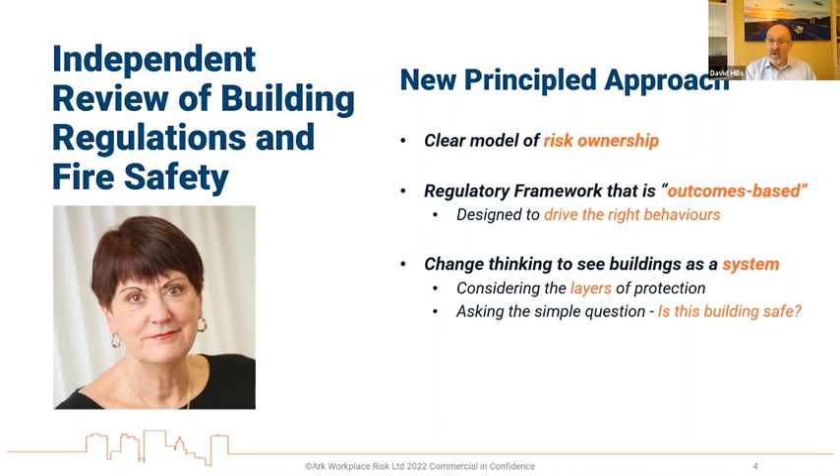In addition, we're looking to change the way we think of buildings and look at them as a system. We discussed this last time with fire risk assessments and risk assessments, looking at layers of protection, and really asking the simple question: is the building safe? And considering buildings on a case-by-case basis rather than being generic about the whole approach.

Finally, the idea is to bring in a risk-based approach to regulatory oversight, thinking about the numbers of people affected and looking at proportionality. So that's where we started from, and that's where the bill was looking to go.

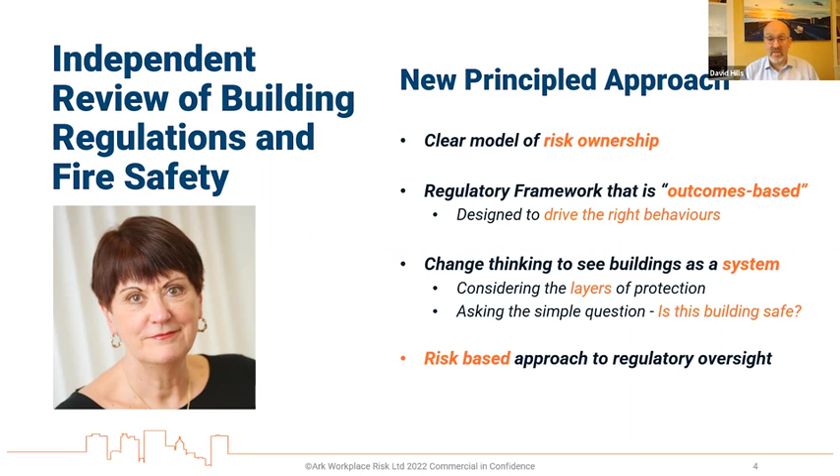Now, the government have put the bill in front of Parliament, and Parliament are reviewing it and making changes. But in the meantime, it's very clear that the government have been telling industry: you've got to get on and do these things. There are substantial changes coming, and we cannot wait for the legislative program to catch up.

Clearly there are some problems with that, especially for organizations who have spent significant money and time working on the building safety manager role. We'll see if that's going to be an issue. Personally, I don't think it will.

The responsibilities are still there. The accountability is still there. And there's going to be a need for competence and support to the accountable persons. So whilst the actual name 'building safety manager' may go, I personally believe the outcome is going to be that you still need some support and some advice.

And what the industry has been told is that there's no excuse, you've got to get on.

So what does the Act do? Well, as I've said before, really it provides you with a number of layers.

We've got the regulatory layer, which includes the new regulator, new rules and regulations in respect of CDM, or at least how the Building Act and construction design and management is operated.

We've got the accountability layer, which is focused on the new roles and making sure that the accountable person and principal accountable person are held to account effectively.

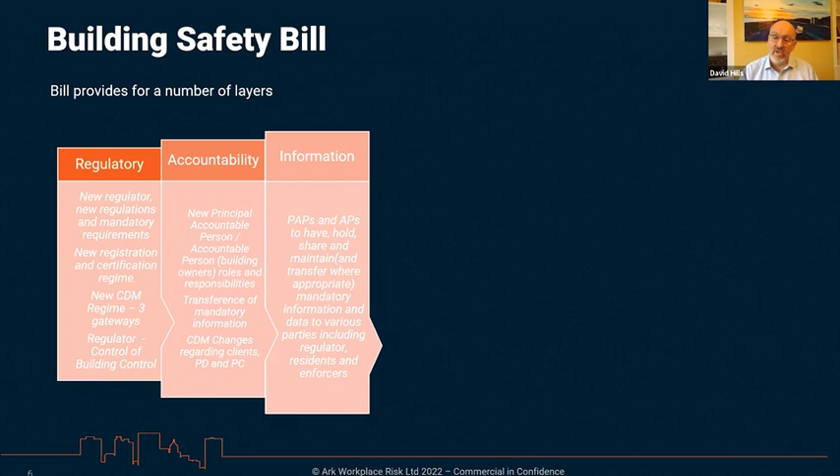We've got the information layer, which talks about the types of information and new requirements. In respect of that, we've also got the technology layer, which is this digital-first approach, making sure that the transfer, sharing, and holding of information is maintained in the right way.

Whilst not within the bill, there is a certain level of defensibility required. Organizations need to actually defend themselves, and therefore there are methods that they are going to need to use in order to achieve that.

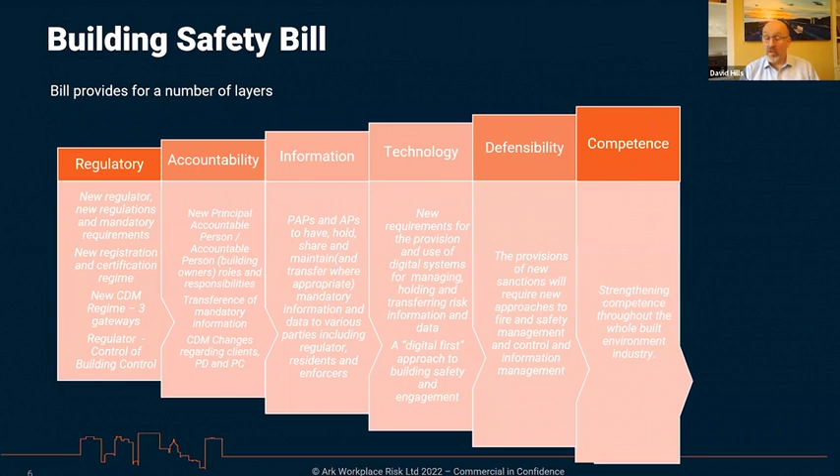We've got the competence layer. There is certainly a need, which I don't think we've really focused on sufficiently at the moment, but competence is going to be key in order to deliver the new regime.

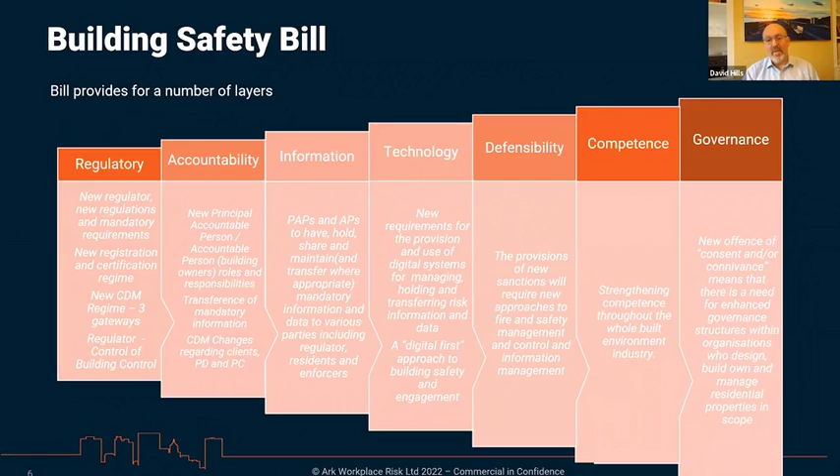And then finally, it's the governance layer. So how the bill operates is very much on the basis that it's actually an enabler. It's an enabling bill, and the first part is going to be the bill itself, the primary legislation.

And ultimately that will turn from a bill into an act, at which time secondary legislation, delivered by the Secretary of State to Parliament, will allow for the various elements of that bill to be commenced, and will start to implement the requirements of the bill.

In addition to that, we're going to have approved guidance, which is risk-based guidance, and will be referred to in the regulations. If any of you have had the opportunity to read some of the draft regulations, you'll already see that there are clauses ready to make sure that this approved guidance will be referred to.

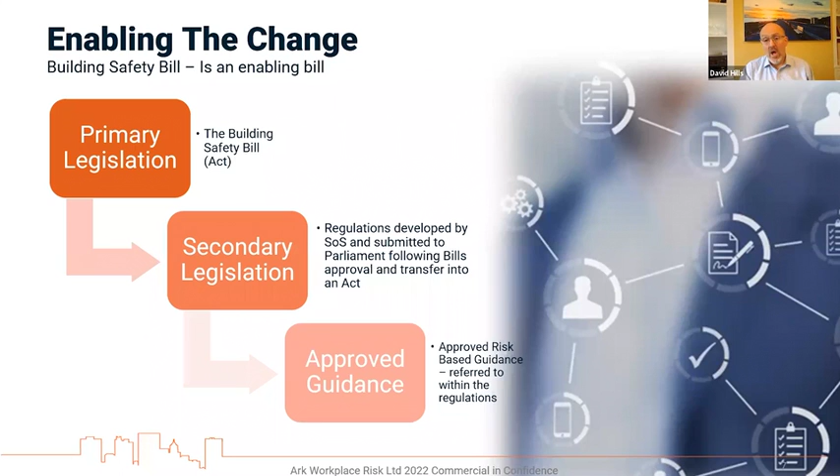So that's really how the bill has been structured, and that's how the bill is going forward. I want to now transfer our thoughts to the outcomes of the bill.

I know Tim is going to be dealing with outcomes, but I also want to talk about the mechanisms, because we've got these outcomes that we want to achieve, but there are certain mechanisms that the accountable persons and principal accountable persons are going to have to adopt when dealing with the compliance elements within the bill.

Traditionally, it's very clear that it doesn't matter what size the building was—a 30-meter plus building, an 18-meter building, even an 11-meter building, or buildings under 11 meters. Traditionally, what we've seen is designers designing, builders building, and people involved in fire safety focusing very much on fire safety.

We've got general safety practitioners focusing clearly on their particular parts, each operating in their own bubble, including those maintaining and managing the building. Each of them is trying to tick their own boxes, operating in these silos.

What the bill is trying to achieve, the outcome of this bill, is to move us away from this siloed effect to a much more holistic approach—to turn around and ask ourselves, very simply: is this building safe? So the outcome of the bill, as far as we're concerned, and it'll be interesting to see if Tim agrees, is that that's what we're looking for.

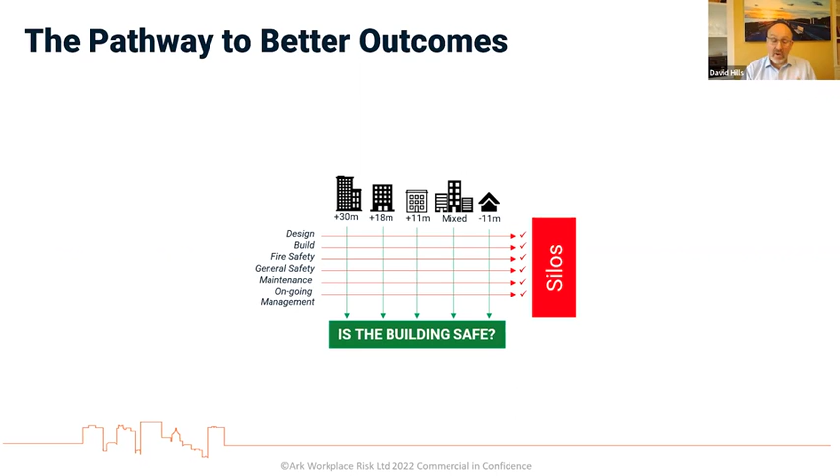Is this building safe? Now, there's a lot that people are already doing that will support that particular claim. So the first thing we've got to start thinking about is what we talked about last time, which is the assessment of risk.

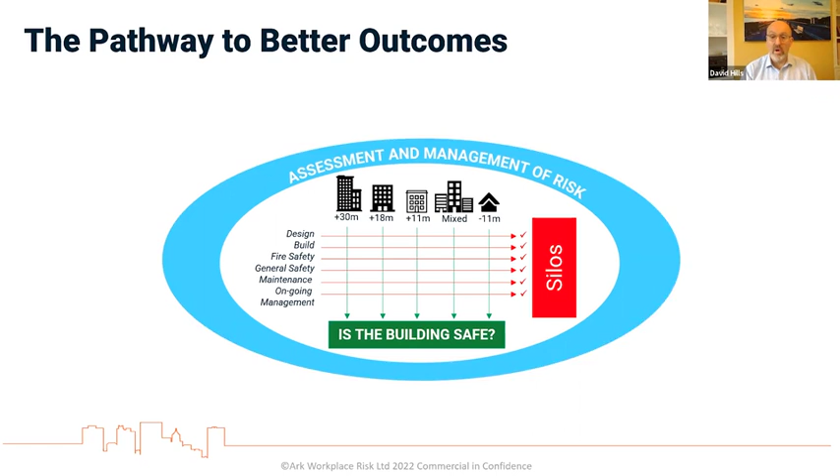Clearly, assessment of risk is going to be a really important element, because this feeds into the actual safety case. That development of the safety case looks to answer a number of simple questions: first, is the building safe? But is it safe now? And is it going to be safe in the future?

It's going to start looking at what information and what systems you use, and what systems are required to manage both fire and structural safety, with the ability to demonstrate that current and ongoing safety of the building can be assured. In addition, that safety case is going to start to think about how you can prevent issues, control issues, and mitigate or reduce the impact of any major accident or incident.

And then it's going to start thinking about the proportional steps that you need to take in respect of fire and structural safety to actually make improvements. Now, that sounds relatively simple in practice, but I think a lot of people are actually getting very worried about the safety case, and it's certainly something that we've been working on with our clients to see how we can support them.

Support them in getting to a position where they can capture that safety case information before they start thinking about that safety case report. Now, obviously, one of the other elements is to actually ensure engagement with all of those concerned - that's the regulator, that's other prescribed persons, and as Dame Judith suggested, the residents have got to start to play a very important role in supporting safety within their own buildings. And finally, the wrap around that is making sure you have the right information as well as the technology to support that.

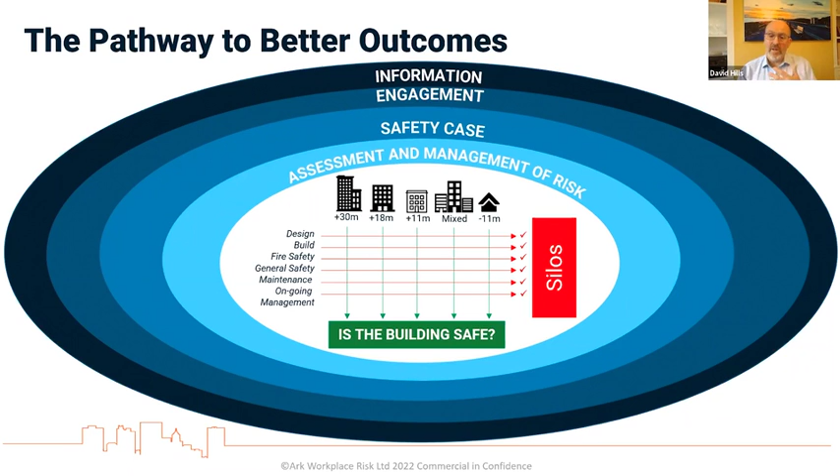So what are the mechanisms that we have in place? The first mechanism we need to think about is the design and construction side. I know Tim is going to be dealing with a lot of this, so I'm going to quickly go through this part. Now, obviously, the new regime that we've had in place is aimed on a very simple principle, that the person or entity who creates the building safety risk should, as far as possible, be responsible for managing that risk.

And therefore, the client is going to be responsible for both registering and notifying all of the relevant bodies, for making sure that key building information is in place, as well as ensuring that the competence of those persons involved in the process is where it should be, or at least making the checks to ensure that it's going to be there. But I want to turn then to the actual gateways themselves.

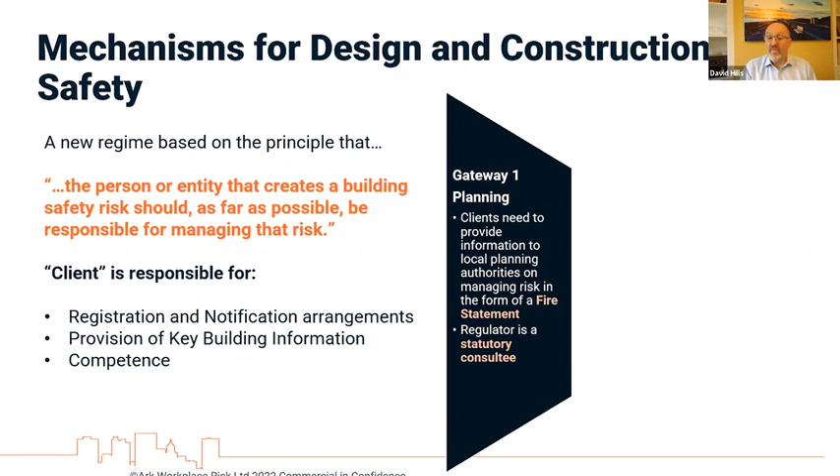We've got a 3-gateway approach. Gateway 1 during the planning phase - and I don't want to spend too much time on this, Tim will go through this. It's all about making sure that during that planning phase, clients will develop their fire statement, which will be provided to the local planning authority, and understand that the regulator already is a consultee with the local planning authorities. We've already seen planning authorities asking for that fire statement, so industry has started to deal with the Gateway 1 element.

Gateway 2 really deals with building control, the need for clients to register their building with the regulator to ensure that within a set period of time they actually provide key building information, and the regulations set out clearly what that key building information needs to look like. There are about 50 elements to that, and that will have to be provided through a technology solution that the regulator will provide.

They're going to have to ensure that full plans applications are submitted and that they are approved prior to commencing works. Now, one of the areas I'd like to understand is what does approval mean? Are we talking about a full approval, or will a conditional approval be accepted? That's going to be something that I would imagine is going to be worked on over the coming months.

And then finally, in respect of this, it's Gateway 3. It's all about completing and handing over the building to the owner. There is a requirement for completion certificates before occupation. Occupation, by the way, defined within the bill, is where there are 2 or more units occupied, as well as ensuring that the golden thread of information relating to how the building was designed and constructed is then handed over to the accountable person, and then clearly made available to the regulator.

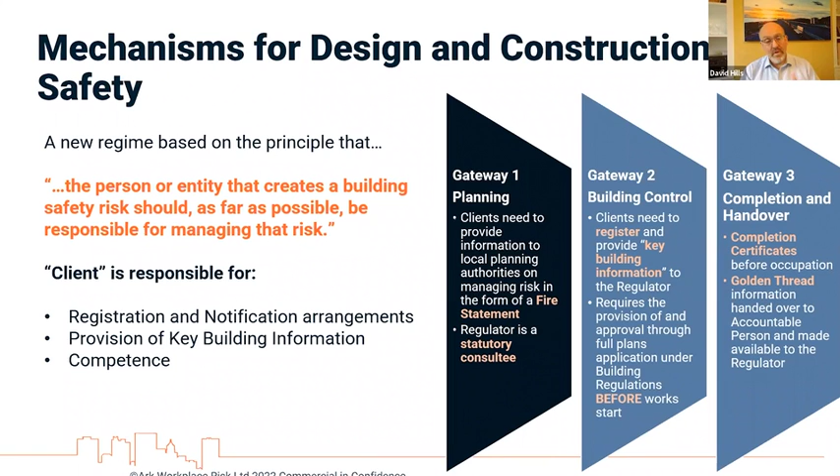I want to focus now on mechanisms for assurance in respect of in-use buildings. Now, the responsibilities and the requirements on the accountable persons and the principal accountable persons are actually quite significant. They don't look like they're going to be changing too much other than one particular area, which I will deal with. But first things first, as an accountable person, you've got to receive information.

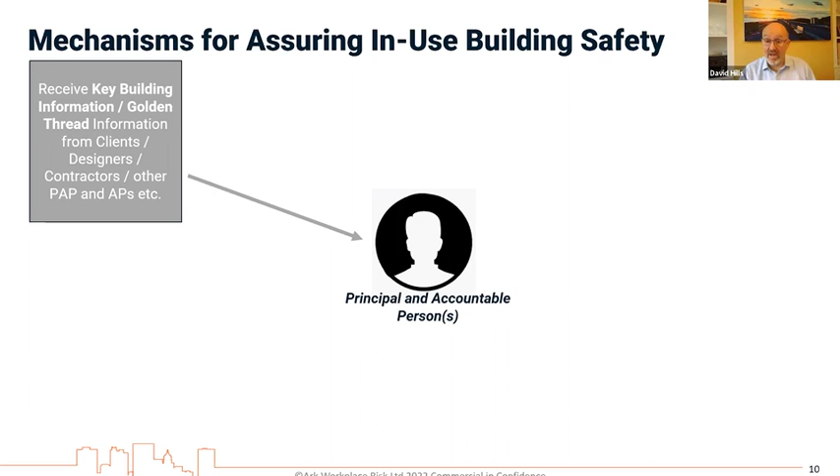You're going to be receiving information from either the client, designers and contractors, etc., if it's a new build, or if it's an existing build, then there'll be a requirement to receive information from the principal accountable person and accountable persons. So the first thing that you're going to have to do as a principal or accountable person is to actually register the higher-risk building with the regulator. Regulation will be in place to determine how that is undertaken, and of course there will be fees payable as well.

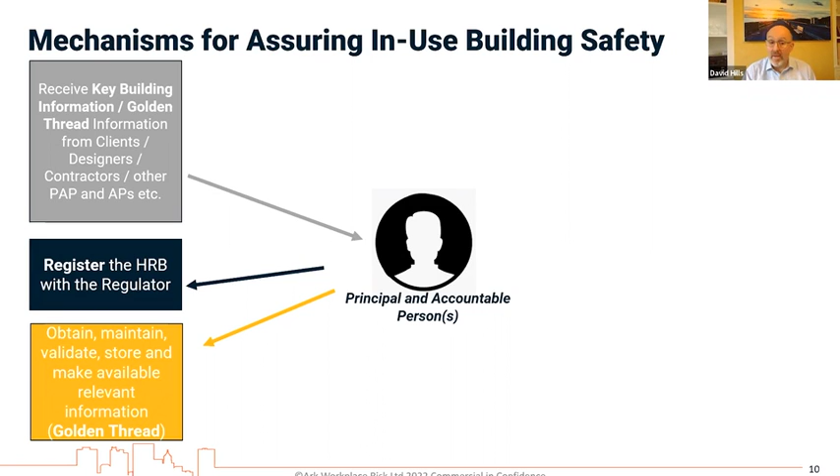You have to take the information that you've received and validate that information. It's very clear that you can't just accept the fact that you've been given some as-built plans and as-built details. They've got to be validated. You've got to be assured that you've got the right information. You've got to store that information and then make it available to the relevant parties. And obviously that's known, as we all know, as the golden thread.

You've then got to provide mandatory or prescribed information to the regulator during that registration process, and that prescribed information will be detailed within new regulation.

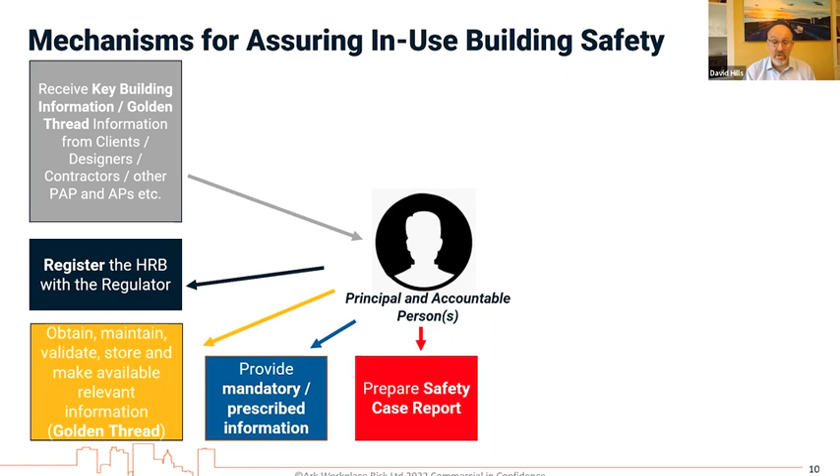You have got to prepare your safety case and your safety case report, which I know we're going to be dealing with probably at a future seminar, but certainly that's one of the areas you're going to have to do. You're going to have to undertake a new fire and safety risk assessment, and then ensure that you manage those risks. That's one of the important parts. It's not just about undertaking that assessment, it's managing those risks that stem from that assessment promptly, as the bill is looking at it and how it's dealing with it.

You've got to actually undertake or develop a mandatory occurrence reporting system. That effectively is going to be a system that will allow you to deal with complaints and issues, manage those, and ensure that the relevant parties involved have access to that information.

In addition to that, you are going to have to look at how you are managing the building. So there are going to be basic building safety management arrangements and requirements that you're going to have in place. And then finally, you're going to have to develop a residents' engagement strategy. I say finally, because obviously one of the other areas as well was to ensure that you've got yourself a building safety manager.

If, as we believe is going to happen - we know that it's been tabled - it's more than likely that that building safety manager role is not going to be there. But the requirements to manage safety are still going to be there. The requirements to validate all of these documents and make sure that they are up to date, that they are correct, and that they are delivering that safety for the residents and for the occupants is going to be vital.

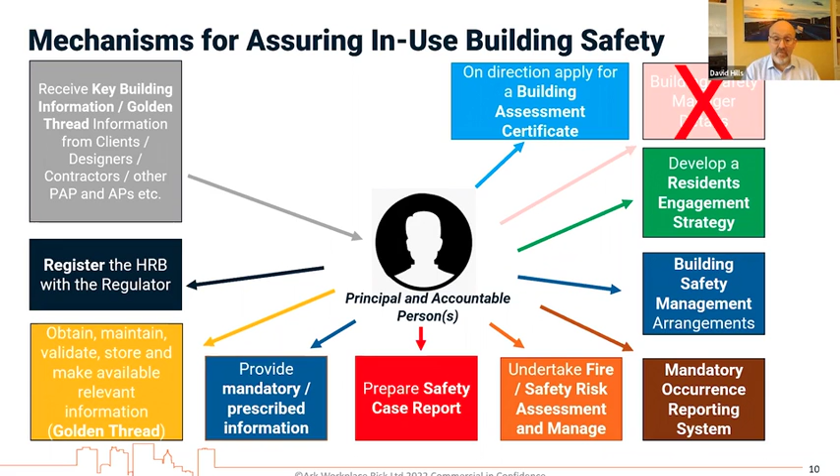Now, the regulator will therefore require certain information, and I'd like to go through that on my next slide. But if they provide you with a certificate at the end of the day, that certificate has got to be displayed in a conspicuous location, along with details of the accountable persons for that particular building.

So as you can see, the actual mechanisms that are in place are actually quite significant, and there's a lot of work that needs to be done. A lot of this work already is in place within many organizations. I think what there now needs to be is consideration of bringing all of this together into a coherent system to ensure and assure safety within existing buildings.

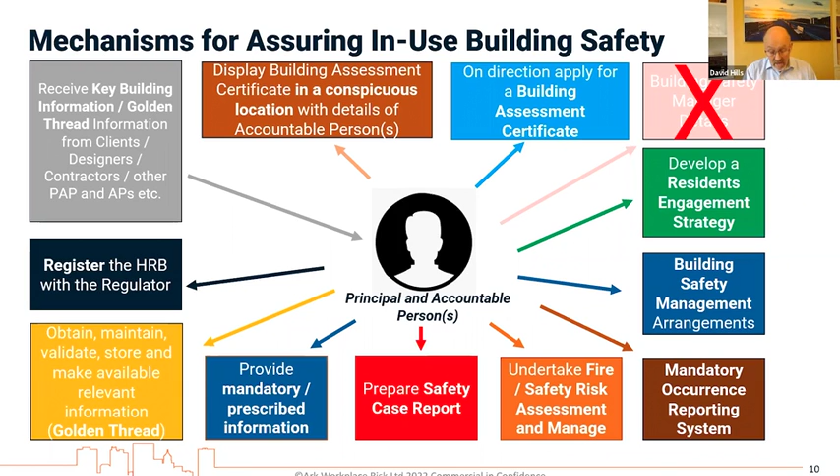Finally, I want to quickly talk about the actual registration and certification arrangements and the mechanics around that. What we've effectively got is principal accountable persons and regulators.

Either before occupation, if it's a new build, or immediately at the time the regulations are commenced for an existing build, there will be a requirement for you to register the high-risk building with the regulator. Along with that, you'll have to provide information and documents that will be prescribed via regulation. We do not know what that regulation looks like at the moment.

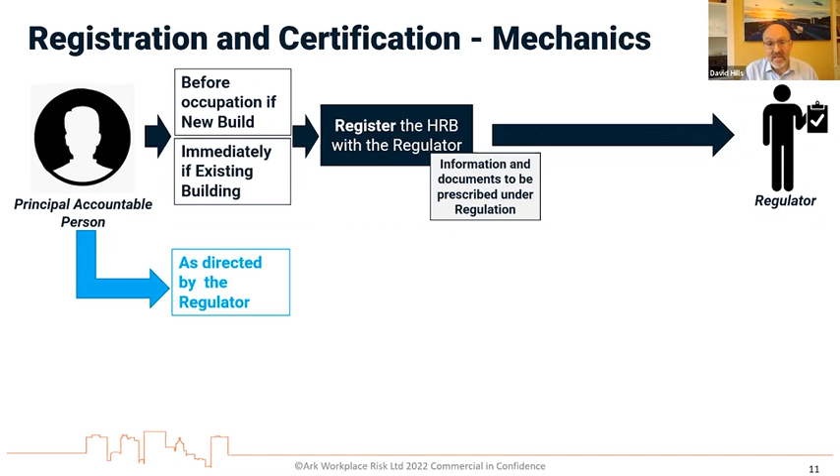If the building is directed by the regulator to apply for a building assessment certificate, you've got to provide within 28 days a significant amount of information you should already have as an accountable person, including your most recent safety case report.

And I say most recent safety case report because the guidance currently makes clear that a safety case report is not going to be a static document. It's a dynamic document that moves as your fire risks are considered, as ownership changes, and as the building itself gets changed.

You've got to provide mandatory occurrence reporting details to the regulator, a copy of your residents' engagement strategy, and in addition, under Section 93, what we call prescribed information, which again will be prescribed under regulation.

Sitting outside of that at the moment, initially there was going to be a need to provide building safety manager details specifically about their appointment, with an option for the regulator to consider that person's competence. But if everything goes through as we believe it will today, that building safety manager role will most likely not be included.

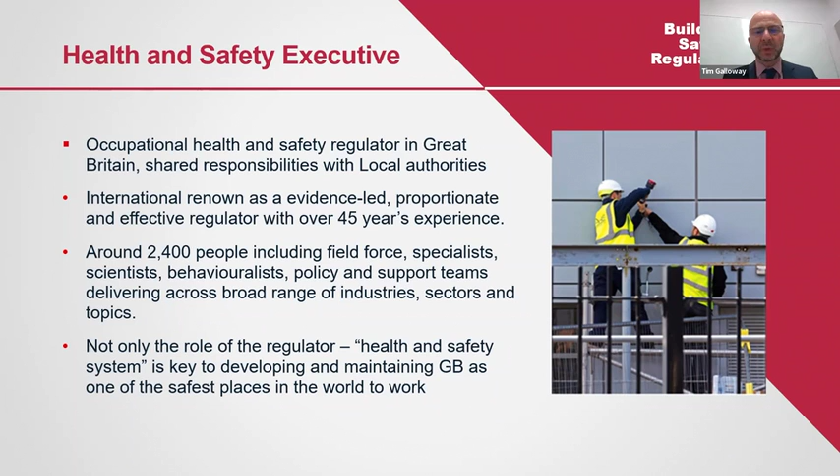If we simply rely on regulators and regulation, I don't think we'll get there. Our aims are that we have a robust regime that is evidence-led, that there's independence about the risk assurance, that there's competence among the industry and the regulators, the building control profession. And we want to re-establish confidence in the system. I think that's key in terms of our aims, and it's another area where the building safety system has to come into play, re-establishing confidence.

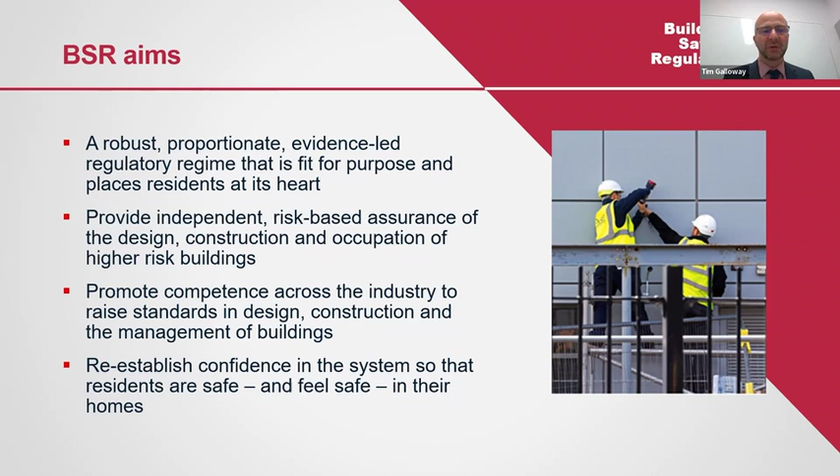When we come into the 18 metres plus, 7 stories or more, the BSR, the Building Safety Regulator, HSE, will be the building control authority and will use multidisciplinary teams to execute much of its work, drawing in the expertise of the local fire service and building control to help us decide whether we can allow a building to be occupied, or whether we can allow the plans in front of us to go forward into construction. That's where the key points in the process, gateways 1 to 3, come in.

They move from a situation now where you can start construction without plans approval, to a situation where it'll be a hard stop. You cannot start to build unless you have approval at gateway 2, and you cannot occupy unless you have the completion certificate, which will be gateway 3, in buildings of 7 stories or more.

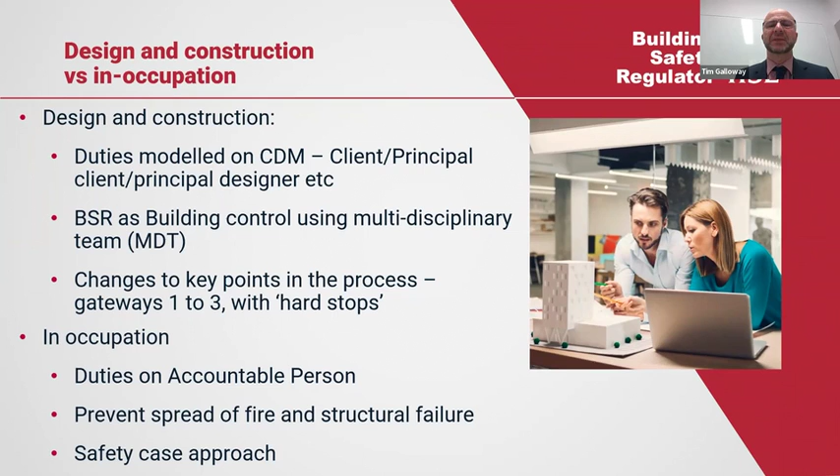In occupation, the focus of the BSR will be very much on structural failure and spread of fire. Those are the key duties on the accountable person: to prevent or mitigate the risk of structural failure or spread of fire. It will be underpinned by a safety case approach, which has worked very well in major hazard industries and is being translated into buildings—which are more stable environments, yes, but still have that major accident hazard element, as we saw, unfortunately, at Grenfell.

I'll pause briefly on this slide. This is work in progress, and I have to emphasize that. But it does seek to give you an illustration as to how the building control process, the design and construction phase, will work, moving from design through construction and completion to registration.

You'll see the words PGO there, that's Planning Gateway 1. That's already in place. For new HRBs at planning stage, when they submit for local planning authority approval, the local planning authority sends documents to us, the fire statement, for our scrutiny as a statutory consultee, and we provide advice back to the local authority. It's been in place about 6 months.

Our early experience is that we are seeing a number of designs coming through where the fire statements don't give us assurance—don't give us assurance that a fire can be fought, or that firefighters will be able to access the building and emerge safely, possibly with casualties or people they've rescued. I'm not going to go into numbers, but it is a significant proportion of designs that we are seeing that we're not comfortable with. We have to go back and say we have serious concerns about this design. And that has started to give me concern about the building safety system.

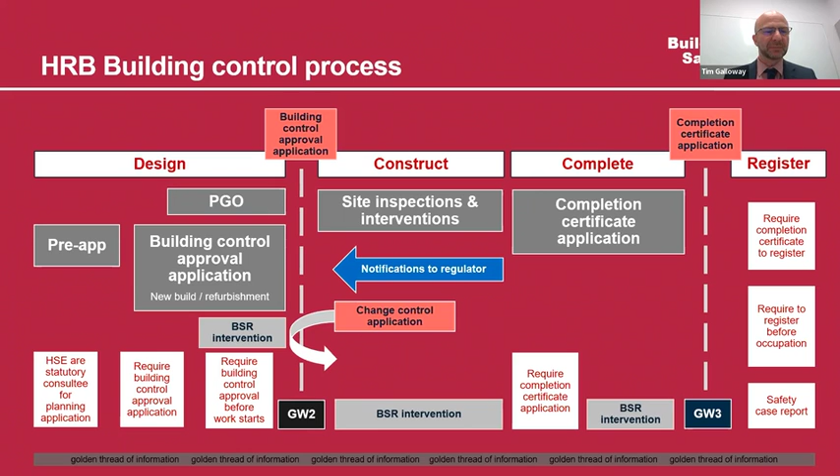Once the building is occupied, we flip into the safety case aspect of the regime.

I want to emphasize some things here. First of all, a safety case is not simply the case of drawing together every piece of information you ever had about the building and bunging it in a box and saying, that's my safety case right there. It's about critical examination of the information you have. And it's enabling you to identify whether you've taken all reasonable steps to make sure the building is safe. Have you done enough to prevent, control, and mitigate the risk of structural failure or the risk of spread of fire?

What you will send to us when we ask you to is what's known as a safety case report. That condenses your argument, that critical analysis you've done, into something where you seek to provide an argument, a statement, and you demonstrate where the evidence that supports that argument can be found.

Just clarifying something, all HRBs will at some point be called in by the regulator. We will need to decide how we deal with large clients who may have 200, 300, 400 buildings, but all safety cases at some point will receive scrutiny across what I call a regulatory cycle, which currently we feel will be about 5 years. There are some 13,000 buildings out there of various sorts currently, plus new stock that will be added. So there's a certain time period that will be required before we get to the last building and then start the process again.

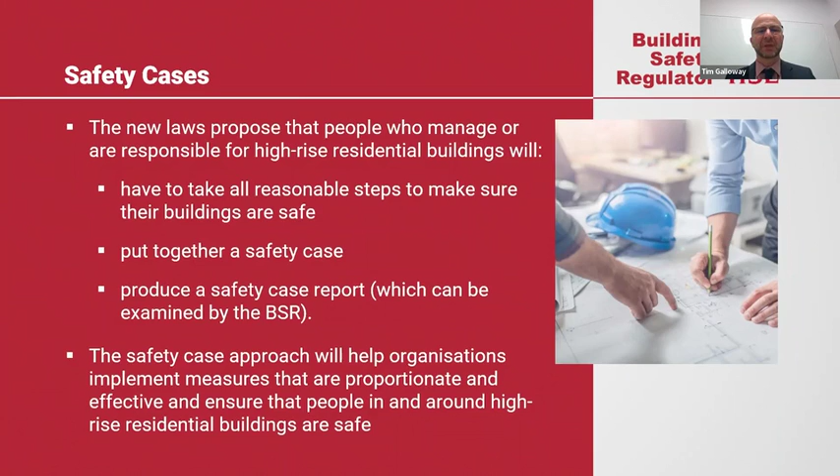If you have certain aspects of that building that rely on residents behaving in a certain way, make it easy for them to behave in that way, because then they're more likely to do it. That's the principle I would suggest you might want to think about.

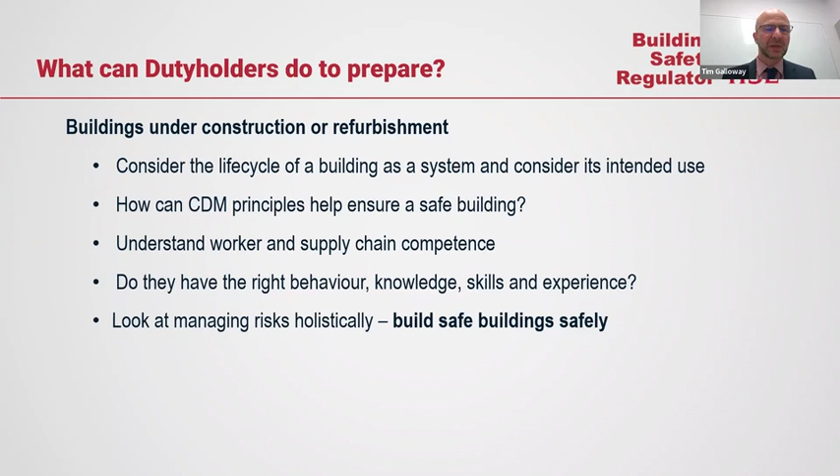You don't necessarily have to have one person with all the skills, knowledge, and experience. It can be spread among multiple people, it can be spread among multiple departments. You know your business, you know how it's managed. But I would echo David's comments that there needs to be coordination and cohesion about your arrangements.

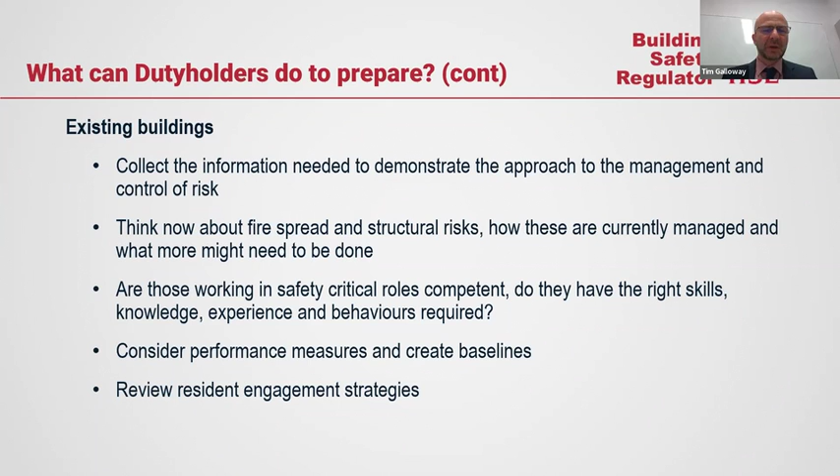I think my next slide is my last slide, which is just encouraging you to keep up to date. We have a newsletter that we're publishing fairly regularly. I'd encourage you to subscribe to that, because that's where you'll get the first new pieces of information that we're putting into the public domain.

Our next key pieces of information are 5 documents that discuss safety cases in more detail, so I'd encourage you to keep an eye out for those. And that is me done. Thank you.